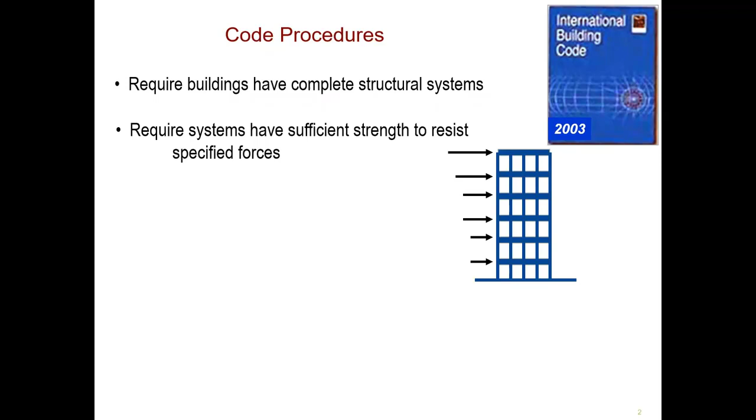So today's topic is the next generation performance-based seismic assessment. And I would like to start with some background. The code procedure, what is a code, a building code? Building codes require buildings have complete structural systems, right? It requires systems have sufficient strength to resist the specified forces, and it limits the permissible drifts under specified forces.

And lastly, it requires members and connections be detailed prescriptively, right? So the purpose of building codes is the ability to resist frequent minor earthquakes without damage. And by frequent and minor earthquakes, their probability of occurrence is 100 years. Okay, the ability to resist infrequent moderate earthquakes with limited structural and non-structural damage, and the return period of that earthquake is 500 years, which is sometimes called the design earthquake.

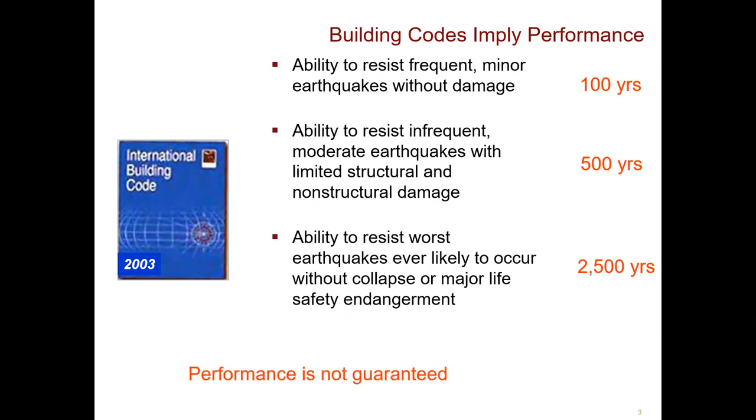And the ability to resist the worst earthquakes ever likely to occur without collapse or major life safety endangerment, and its return period is 2500 years. So the building codes give you the safety, but the performance is not guaranteed, right? And if a building is affected by an extreme event and performs poorly, there is an expectation of how the building should have performed, but no implied warranty.

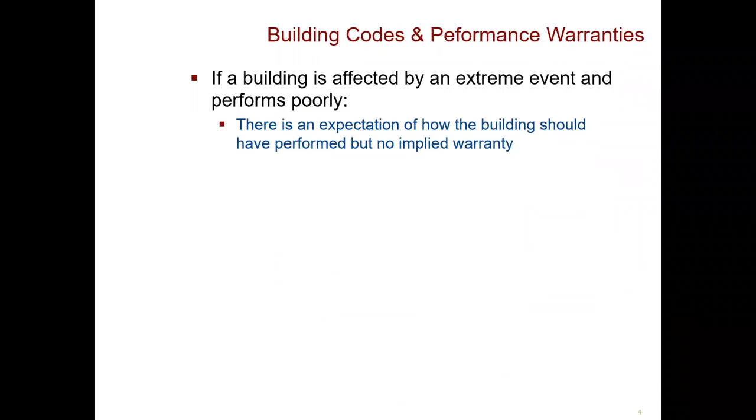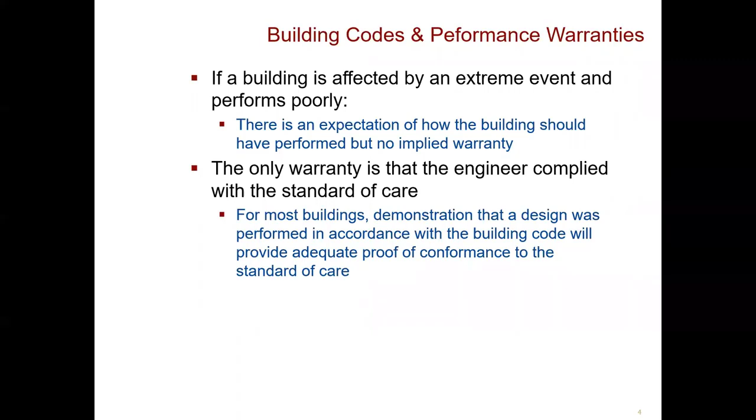Secondly, the only warranty is that the engineer complied with the standard of care. For example, if he has followed the building codes, the design codes, then this is the only warranty that the structure will not fail during a certain earthquake of a specific return period. For most buildings, the demonstration that a design was performed in accordance with the building code will provide adequate proof of conformance to the standard of care.

FEMA document 178 is the seismic evaluation of structures, specifically buildings, and FEMA 356 is related to the rehabilitation process. So though not directly recognized by the building codes, these standards are being used as the basis for performance-based design of new buildings and seismic retrofit.

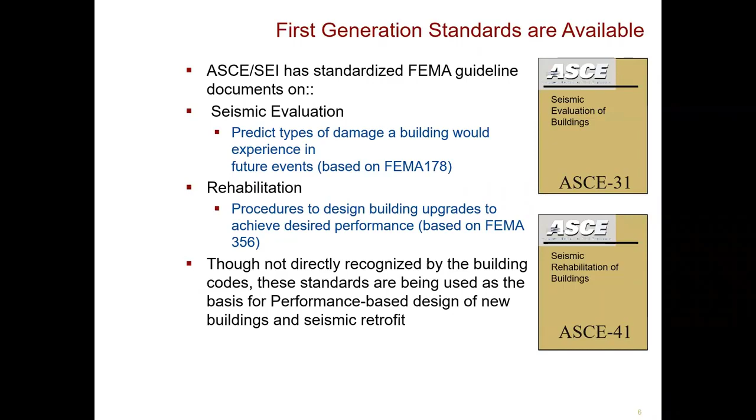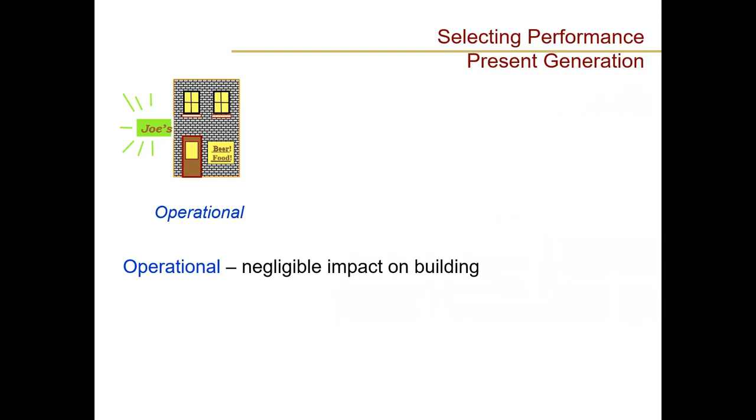So now we are moving towards performance-based design or assessment. What is performance-based design? What does performance mean, right? So before going into detail, we need to understand what was the performance criteria in the first generation of performance-based earthquake engineering. For example, it is a house. The nameplate says it is Joe's house, right? And there is beer and there is food in this house, and it is fully operational.

Now, what does immediate occupancy mean? That it has been affected during the earthquake, but you can occupy it immediately after the earthquake, right? So operational is negligible impact on the building, right? And immediate occupancy is the building is safe to occupy, but possibly not useful until cleanup and repair has occurred.

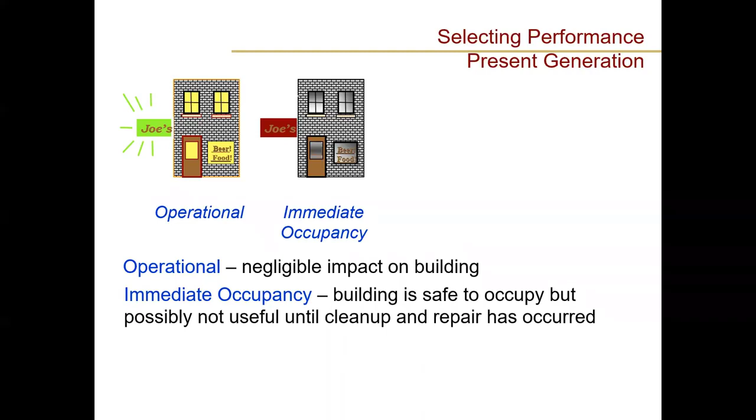So there is a chance that some non-structural components have been cracked or damaged, and you need to clean those plasters and the distempers and some of the items from your cupboard or your kitchen utensils that might fall. So you need to clean up all those things, right?

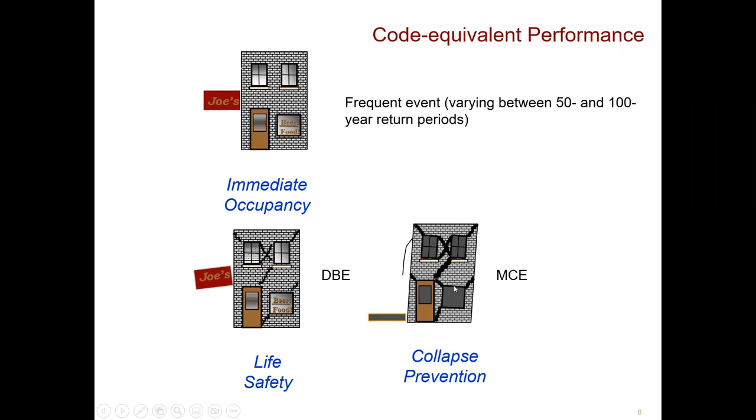So after that, the ATC 58 project started. And what is ATC? It is the Applied Technology Council. We will discuss it in detail. And it started a 10-year program which was funded by FEMA, and its objective was to develop the next generation criteria applicable to design of new buildings and upgrade of existing buildings, right?

So the new performance definition required at that time, at the beginning of a new century or the new millennium, was performance expressed in terms of the probability of incurring the direct economic loss, which is in terms of repair or replacement cost, the casualties, which includes the deaths and the serious injuries, and the downtime, which is loss of use.

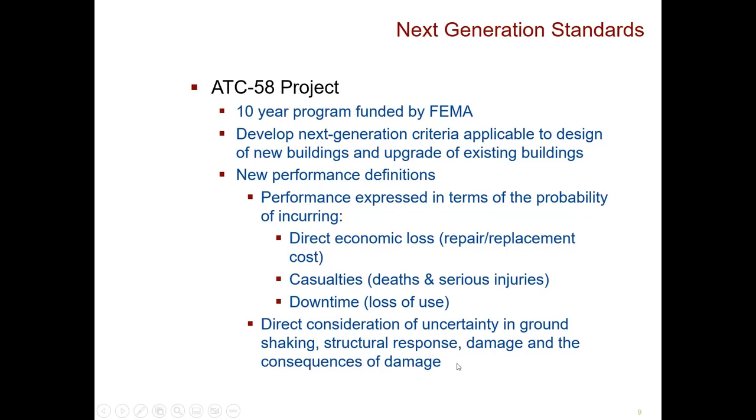So in the recent earthquake of Turkey and Syria, you might have noticed the economic losses and the casualties and the downtime of the structure, right? So it is all based on the next generation performance criteria. So the direct consideration of uncertainty in ground shaking, structural response, damage, and the consequences of damage. So you have to consider all these in your performance objectives, right?

So the first step is to select the performance objectives, which is to be selected by the owner, the designer, and the building officials. For instance, in Peshawar, the PDA is the building official, right? The second step is to develop the preliminary design and to check or assess the performance capability.

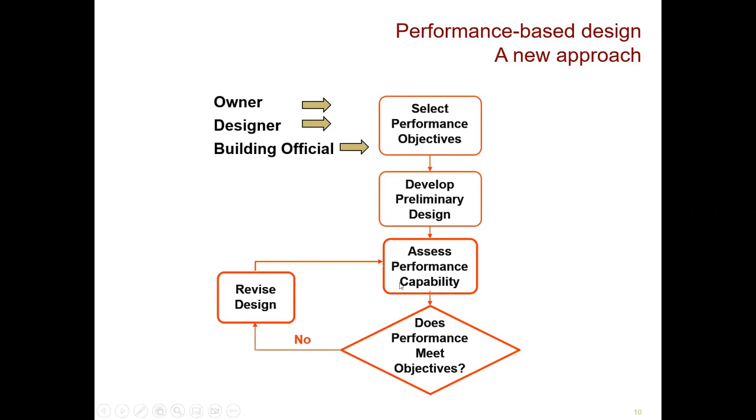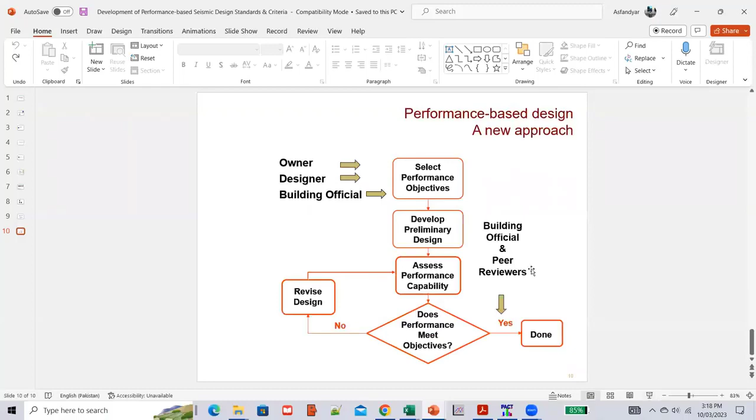And then, does performance meet the objectives? If yes, then you are okay. If no, then revise the design and continue this cycle until you get this yes, and then it is done. Okay, and it is done by the building official and the peer reviewers. So it was a very small introduction about today's topic.

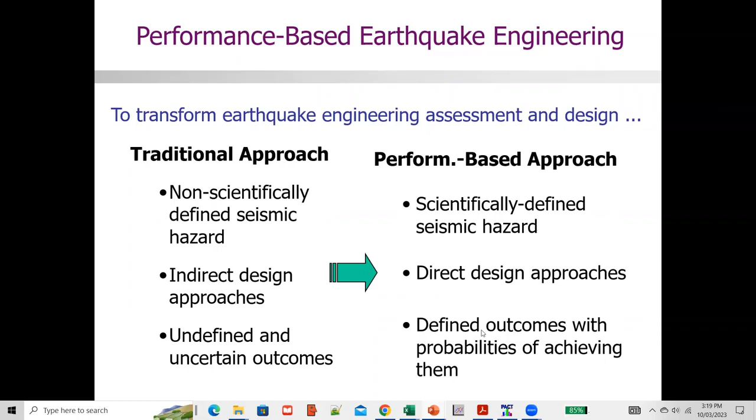Now I would like to give you some insight about performance-based earthquake engineering. To transform earthquake engineering assessment and design: the traditional approach was a non-scientifically defined seismic hazard. Instead of indirect design approaches, you define outcomes with probabilities of achieving them, right? So there are some well-defined outcomes and you have to achieve those outcomes.

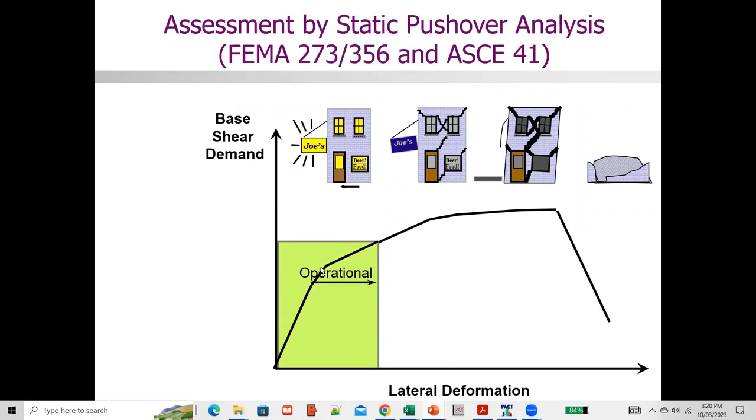FEMA 273 or 356 and ASCE 41 give this assessment criteria where you can see that the base shear demand and the lateral deformation are plotted, and the lateral deformation increases, causing the base shear to increase up till this peak or the ultimate strength value, right? So till this point your structure initially acted within its elastic range, right? So up till this point it is called operational.

After the operational, it is in the range of life safety, and till this peak point, the maximum or the ultimate point, it is structurally stable and it will not collapse. But after this point, the structure will collapse. So you need to be careful about this peak point or the maximum resistance of the structure.

The frequent earthquakes, which have a 50% probability in 50 years, it will resist those earthquakes in this elastic range. The occasional events, which have a 20% probability in 50 years, will occur within the operational range, but in the inelastic range, right? The rare events, which have a probability of 10% in 50 years, will lie in this range. It means that the structure will resist those earthquakes in this range.

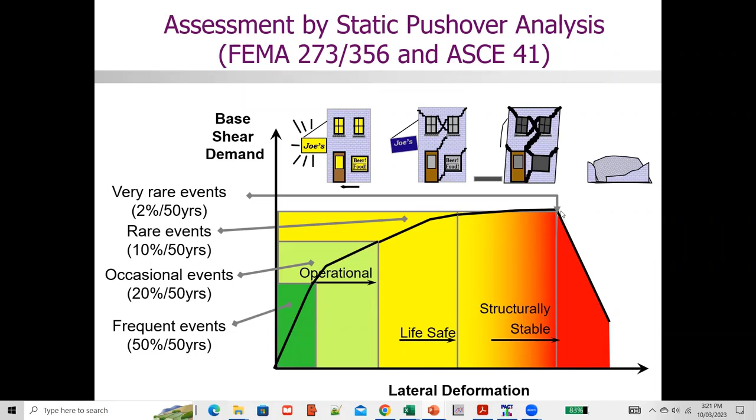And very rare events, which are also called the maximum considered earthquakes, the structure will resist them at the ultimate load, but eventually it will not collapse and it will be at the verge of collapse. So the inhabitants will be safe during the earthquake.

Now, yesterday's, meaning the previous, performance-based earthquake engineering was what we just discussed in this slide, right? But it is not today's performance-based earthquake engineering. What is today's performance-based earthquake engineering? As we discussed in the previous presentation, it is more about some well-defined objectives: what will be the replacement cost, what will be the casualty rate, and what will be the downtime in days, for example.

So if you are talking about life safety, right? At the life safety level, the replacement cost of the structure will be about 75% of its total cost, the casualty rate will be 0.01%, and the downtime will be about 50 or 60 days. It means that you cannot use the structure for about 2 months. So this is more realistic, and this is what you can tell your client, because it is more understandable language.

So performance based earthquake engineering has changed today, right? The damage assessment of the non-structural fragilities is as important as the damage assessment of the structural fragilities. Because in the previous approach we just needed to consider the structural elements, draw their fragilities, and analyze the structure. But in the next generation performance based assessment, we need to consider those non-structural elements and their failure pattern as well.

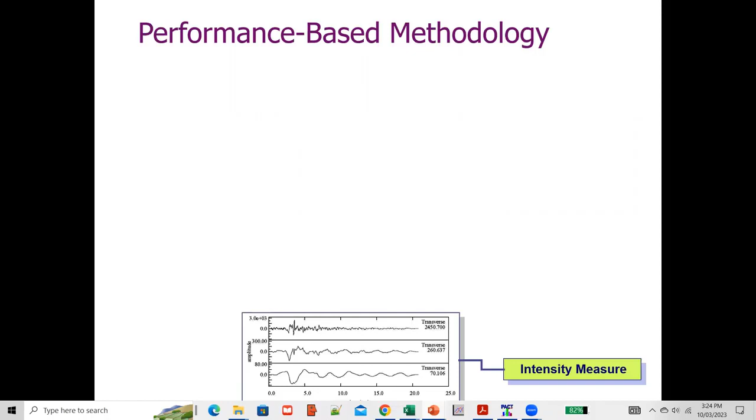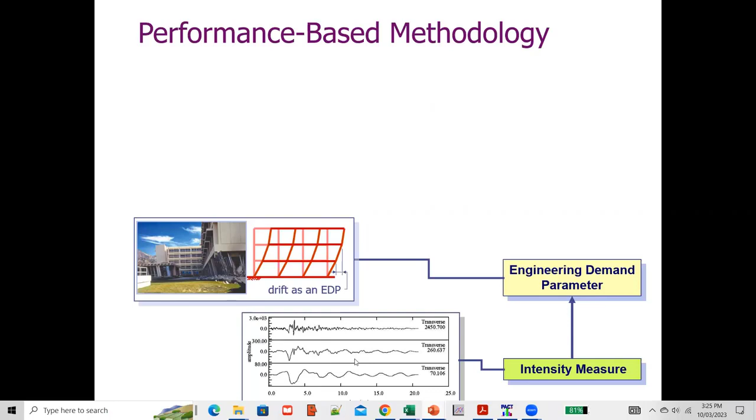Now moving to the performance based methodology. You have to define the intensity measure. The intensity measure is your time history. For example, you take the time history of some earthquake, model your structure, and run the time history analysis. I'm just using time history analysis for instance; you can use different methods. From that you measure the damage that occurs in the structure, and on the basis of all these parameters you decide your variables.

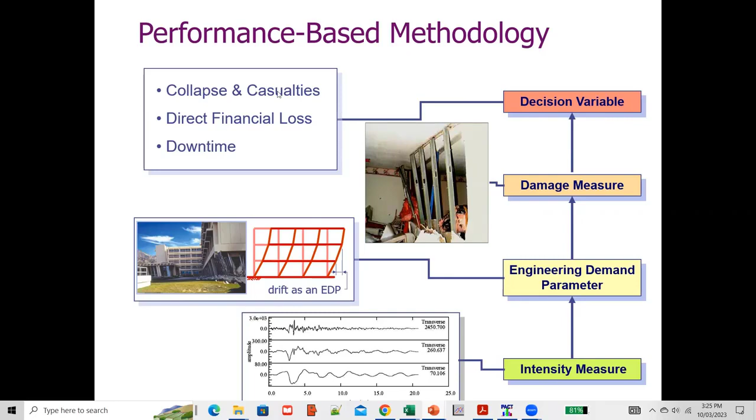For example, how much was the collapse and the casualties, how much was the direct financial loss, and how much was the downtime. In performance based assessment you need the incremental dynamic analysis as well, and later we will discuss an alternative, because it is a complicated thing and not everyone can perform it. You can do it with the standard pushover curve, and I will show you how to perform the incremental dynamic analysis with the static pushover analysis.

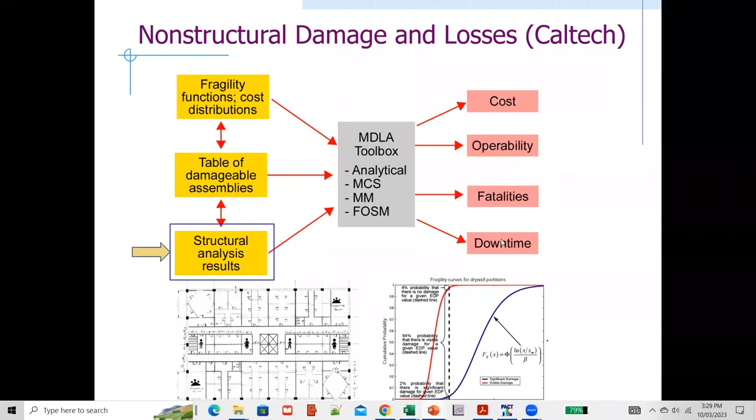The non-structural damage and losses, you can compute it by different toolbox and different methods. What are the input required? The fragility functions, the cost distribution of the non-structural elements, the table of damageable assemblies, and the structural analysis results. So all these three goes into this toolbox, and they give you the cost, the operability, the fatalities, and the downtime, right? Which we are keep on talking again and again.

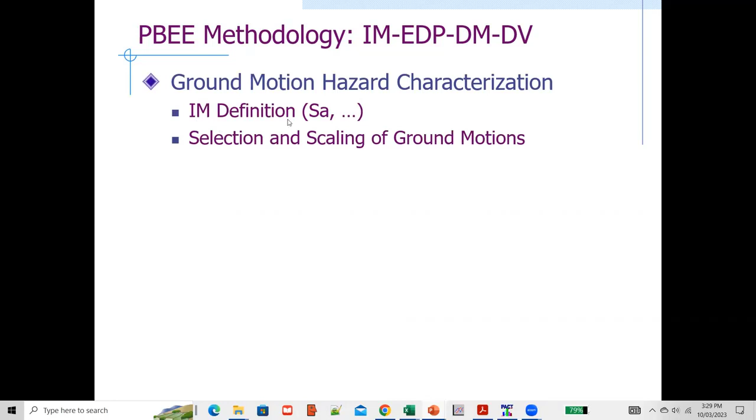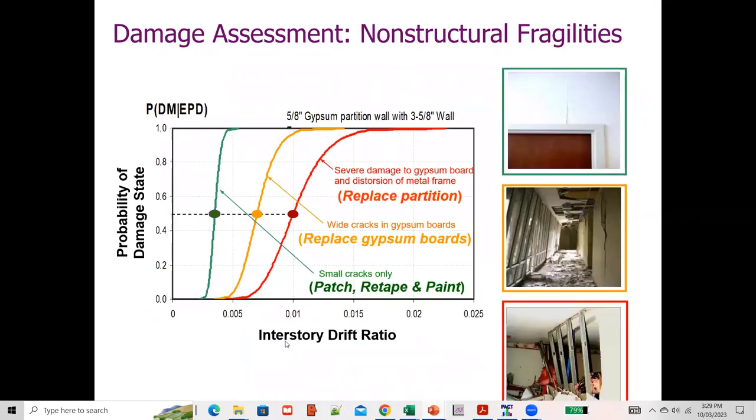So the performance-based earthquake engineering methodology, the ground motion hazard characterization, where you have to define this intensity measure, for example, the spectral acceleration, the selection and scaling of the ground motions. The second step is the simulation, right? Engineering demand parameter. The choice of engineering demand parameter is, for example, we talked about the drift, right? Let me take you to the graph. See, here the demand is structural response in terms of drift. Also, if we go back to here, also the demand parameter is inter-story drift ratio, right?

So it depends on you what you are gonna take as the engineering demand parameter. You can take it as a drift, or you can take it as a floor acceleration, or any other. For example, the velocity, the fidelity of simulations to model the collapse, right? The third step is the damage modeling. So first you have to define intensity measure, then from intensity measure you have to define the engineering demand parameter, then from the engineering demand parameter you have to go for the damage modeling. For example, the taxonomy of the components, the definition of conditional EDP to DM, that is damage function.

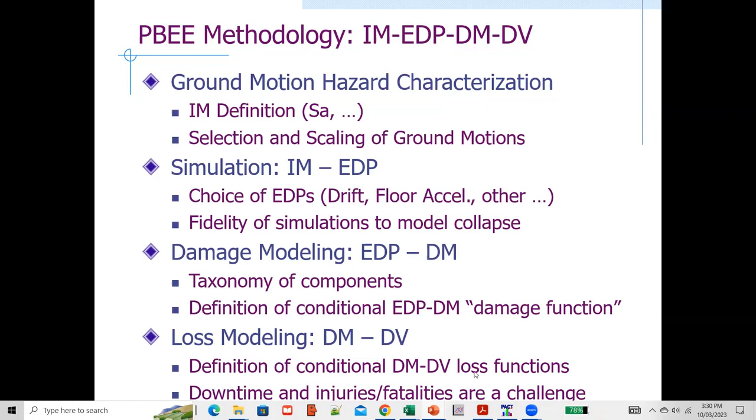And the fourth one and the final one is the loss modeling, right, which is called the decision variable, DV. So definition of conditional DM, DV loss functions and the downtime and injuries fatalities are a challenge to compute exactly and accurately. So this is basically the flow chart. It goes upward. You have to define the intensity measure, which is the earthquake hazard characterization, right? You select some certain earthquake and you take it as your intensity measure. Then you find the engineering demand parameter.

For example, you subject your structure to that earthquake and you simulate the system response. And due to that system response, you quantify the damage measures, which is called the damage measure, the third step. And the final step is on the basis of these damage measure, you define your decision variable, which is relating performance to risk decision making. And these are in terms of the things that we just discussed.

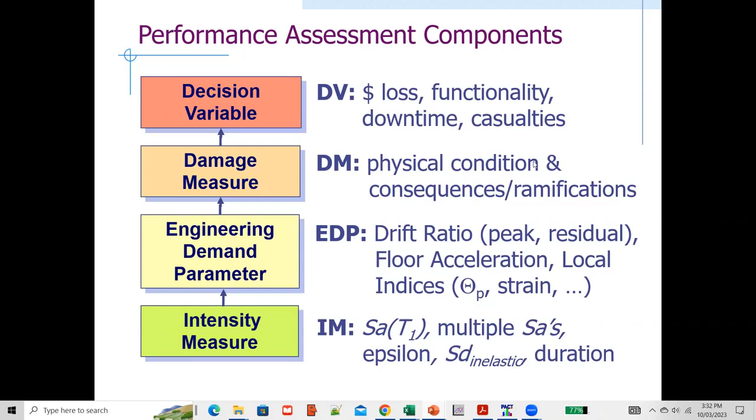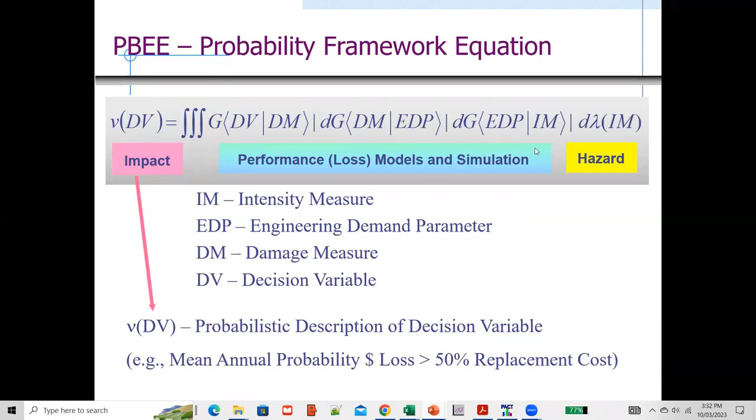For example, the spectral acceleration can be your intensity measure, and you can use multiple SAs, epsilon, which is the strains, right? The SD, inelastic duration. The EDP, as I already discussed, can be drift ratio, floor acceleration, local indices, etc. The damage measure can be physical condition and consequences or ramifications, and the decision variable can be loss, functionality, downtime, casualties, etc. This is the equation that has been used to compute this decision variable, and it depends upon DV, DM, EDP, and IM. All of them we have just discussed in detail, right?

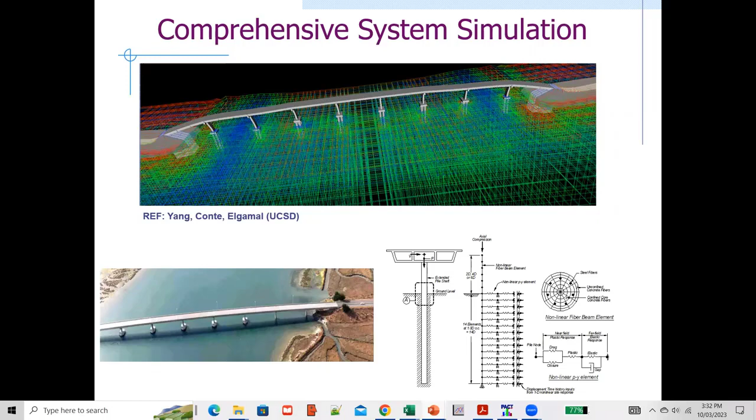This is an example of the simulation model that you run the simulation, you get the structural analysis result, and you get the structural response, and on the basis of that you measure the damage variables. And after that I would like to take you to what is the FEMA P58. So FEMA P58, you can just simply Google it, and you can see that the history of FEMA P58, what it says that it started in 2001.

You can get all the details of ATC 58, the Applied Technology Council, and they performed the research for more than 10 years. And then they have given you a complete package, right? And that complete package is about the next generation performance based seismic design guidelines, and you can follow these guidelines and you can just perform the next generation performance based seismic analysis of your structure. But you need to understand what are the requirements of this system. For example, you can go to different, you know, the volumes.

There are different volumes, volume 1 to volume 7, and you can download them, you can read them, and it will give you a very detailed description and the requirements that you need to follow in order to perform this performance based assessment, which is the state of the art method.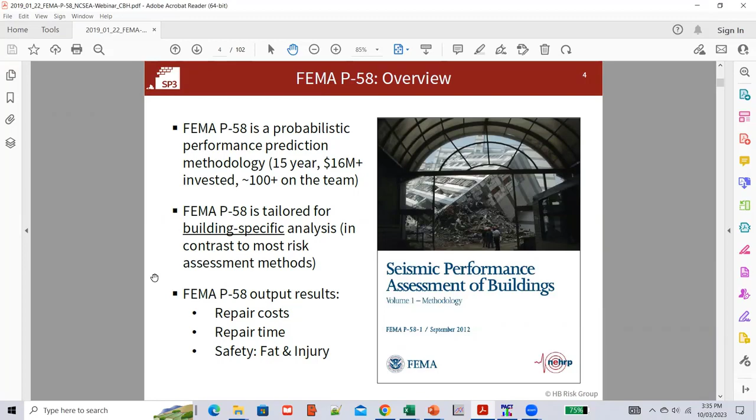So FEMA P58 is a probabilistic performance prediction methodology, and it took 15 years and 16 million plus dollars invested, right, with 100 plus members on the team. So FEMA P58 is tailored for building specific analysis in contrast to most risk assessment methods, right? FEMA P58 output results are the repair cost, repair time, safety, injuries, fatalities, and casualties.

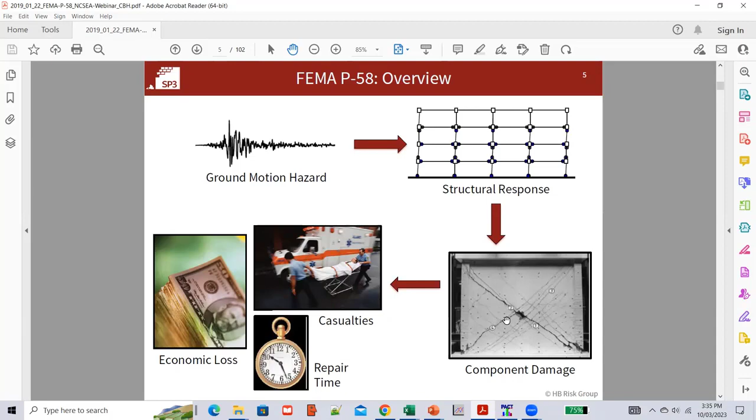The overview is that you need to define a ground motion hazard, and you run your structure, and the structural analysis will give you the structural response. Then you need the fragilities of your structural elements and the non-structural elements. So you need to put the component damage, and on the basis of that component damage, it will give you the casualties, repair time, and economic loss.

The comprehensive and credible benefits are that it took a lot of resources. Just like we discussed, the standardized and repeatable consistent FEMA P58 damage and repair cost databases are used consistently for all analysis, right? Because it is created based on 20 plus years of research, and the analysis incorporates the specific nuances of the building rather than being based on a building class. So you can use it for a variety of buildings.

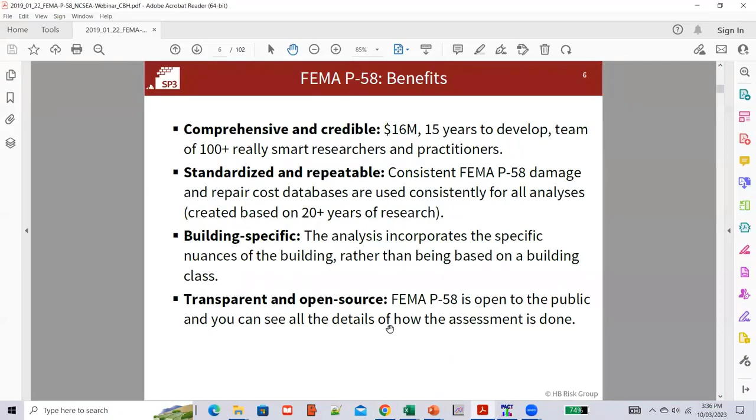The transparent and open source FEMA P58 is open to the public, just like I showed you. You can go and download it for yourself. It is open to the public, and you can see all the details of how the assessment is done, right? And these are the detailed steps of the method, and I will show you the method by following these steps.

The site hazard, the structural response. I think this is the fifth or sixth time that we keep on repeating these things, because these are the fundamental steps that we need to follow. The structural component fragilities, the non-structural component fragilities. This is the new thing that you will understand in this exercise. And then FEMA P58, which is using a Monte Carlo analysis engine, runs and gives you the results, right?

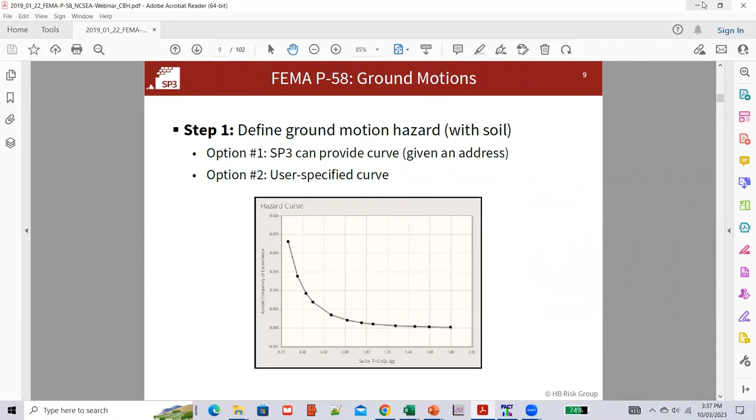So instead of performing the things here, let me take you to that software which is called PACT. You can just download it. It is here. The first one, you can see performance assessment calculation tool, which is executable software for PACT, and this is the latest version 3.1.2, and you can download it. It will get downloaded very easily, and just run it, and you will see an interface like that, right?

So here are different buttons. These are related to your PACT operation, and these are related to your PACT utilities. Before going to the PACT utilities, I will take you to how it works. For example, go to model the building and import analysis results. So just click it, and an interface like this will open.

Okay, so here the first tab is about the project information. You need to enter the information of the project. For example, the project ID, the building description, the client description, the engineer description, and the cost multipliers, right? The date cost multiplier and the region cost multiplier.

For example, if it is going to happen in 2024, then the cost multiplier will be, let's suppose, 1.25 to the original one. And it also depends upon the region. You can also do it. For example, there will be a cost difference in Karachi and in Quetta, right? Or a remote area, for example, in Gilgit, the cost will be much more than in the main hub, right? So you can define this basic project information.

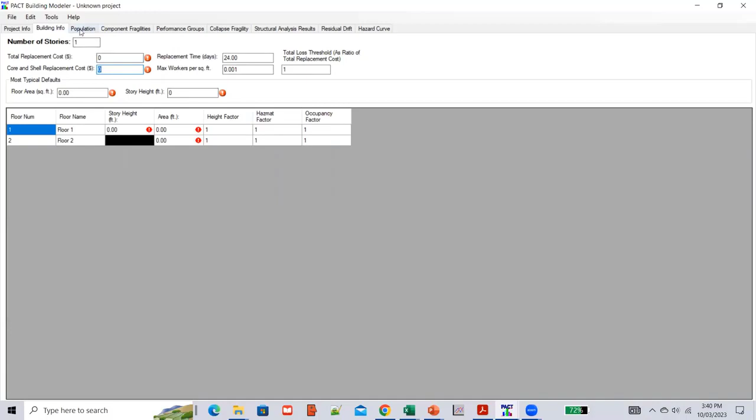And the third tab is about the population, because it is very important to know whether it is a commercial building or a residential building. And what's the difference, let me show you. If you are designing or assessing a commercial building, you can see the population model for that is, let me select, right. So here you can see that at 12 in the night, there is a 0% probability that someone will be in the building, right? But at 10 a.m. in the morning, 10 to 11, there is a 100% probability on the weekdays that it will be fully occupied, for which it was designed originally, right?

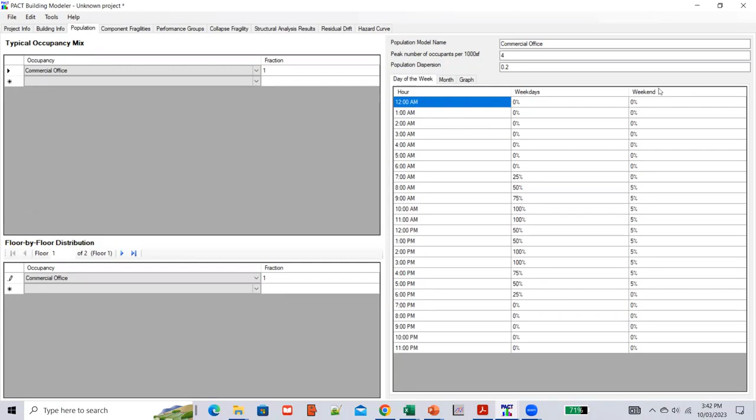So it gives you the probability of that earthquake happening, for example, at what time of the day and what day of the week. So what will be the population model? And it is very important. If you check the graph for this commercial office, you can see it is like this, right? This is for the weekdays and for the weekend. For the weekdays, it is going from 0 to 4, because the peak number of occupants per 1000 square feet is 4. You can increase it, you can make it, for example, 50, right? So it is up to you.

And if you go to, for example, the weekdays, it is going from 0 at 6 a.m. to 50 at 10 a.m., right? And then the break, and then again coming back from the break, and at 7 p.m. in the evening, it is again going to 0 for the weekdays. And for the weekends, it is 0 up to 7 a.m. And there is a 5% probability, so most probably 2.5 persons are in the building till 6 p.m., and then it is going to 0.

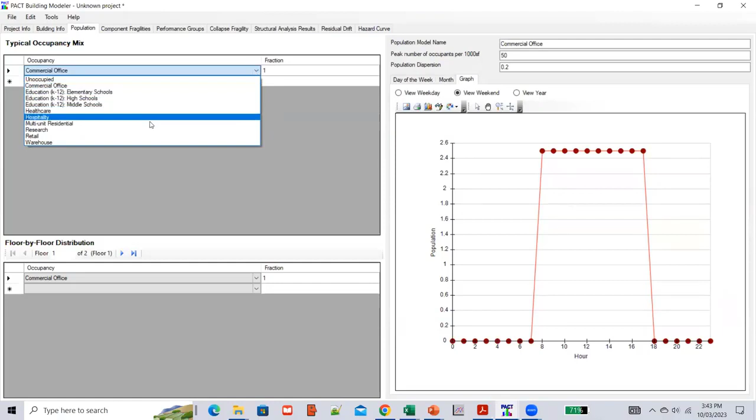Now if you select residential building instead of commercial, what will happen? For example, it is a multi-unit residential here and here as well. So you can see that the weekend is just opposite to that of the commercial one, right? Because everyone will be at home in the night, and they most probably go out in the morning, spend the day outside, and then come back in the evening, right? So this is for the weekend. And for the weekdays, there is a probability that the residential units will not be occupied. For example, in the night, it will be completely occupied, because here the peak number of occupants is 3.1, so it is occupied 100%.

And let me take you here, you may easily understand. So on the weekdays, it will be occupied 100% in the night, and 20% because some inhabitants might stay at home, and they do not need to go for jobs or business or some sort of activities outside the home. And in the weekend, the probability is that it will be at least 50% populated. So this tab will give you the population density during the week and during the day of a week.

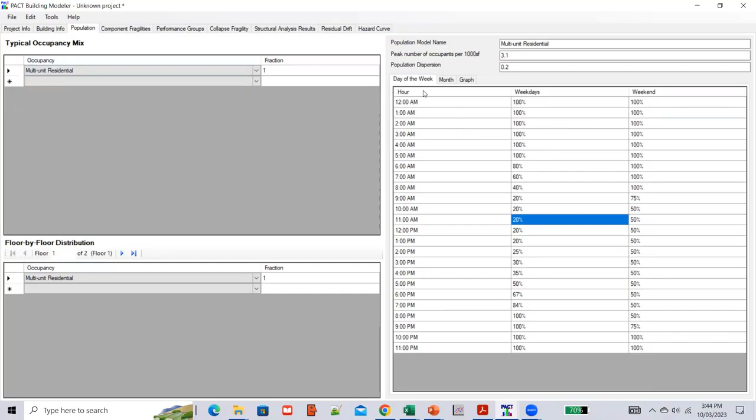So it is very important to define it correctly. Then a very important tab called the component fragilities comes, and for that you need a tool which comes here, the provided fragility data. You have to download it, and it will give you this Excel sheet, which is this normative quantity, right?

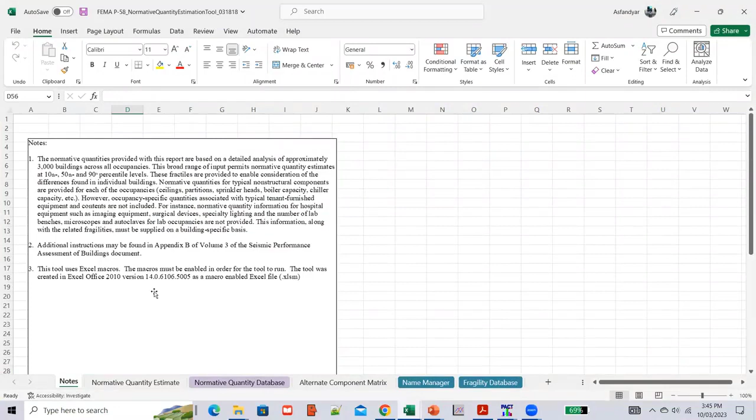After defining this, you just click compile, and it will tell you how many groups should be in your structure, how many structural components and how many non-structural components should be in your structure, given the details you have provided. So this tool will tell you, for example, how many wall partitions of gypsum with metal stud have to be used in the interiors, right? Similarly for floor finishes, wall finishes, the ceilings, etc.

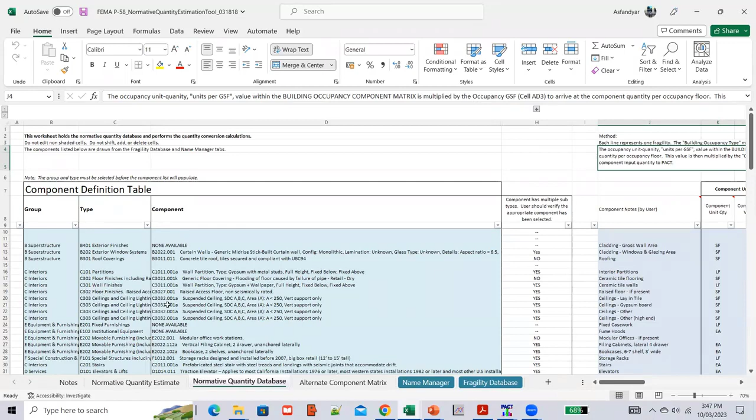It has calculated all these things based on the details you provided in this highlighted area, and you can calculate here what the claddings are for the glass wall area, and what the 10th percentile quantities are, and you can name it. You can specify it for your structure, and after doing this you can go to PACT and easily specify, for example, I am working on floor 1, and what will be required in the foundation. So you can select in your foundation any type of fragility that has been given to you by that software.

If you select it, it will give you the detail. Okay, I am not going to show it here. I will open an example, and then I will show you these things. Okay, so just now we are going through it.

The next step will be the performance groups, and it is linked to these component fragilities. Once you define it, you can export it here. You can click update table in direction 1, direction 2, and non-directional. So you can import the data over here, and go to the next step, which is the collapse fragility. You can define the collapse fragility for your different structures, for example, the median and the dispersion, and you can define your collapse fragility for different floors as well.

The next step is structural analysis, and as we discussed in the presentation, the structural analysis basically requires incremental dynamic analysis, right? But not everyone can perform incremental dynamic analysis. So PACT, or FEMA P58, has provided a tool called static pushover to incremental dynamic analysis, and when you download it, it will be in the form of this Excel worksheet, and it gives you the instructions you need to follow. See, it says that it was last updated on January 9, 2012, and has been used successfully since then.

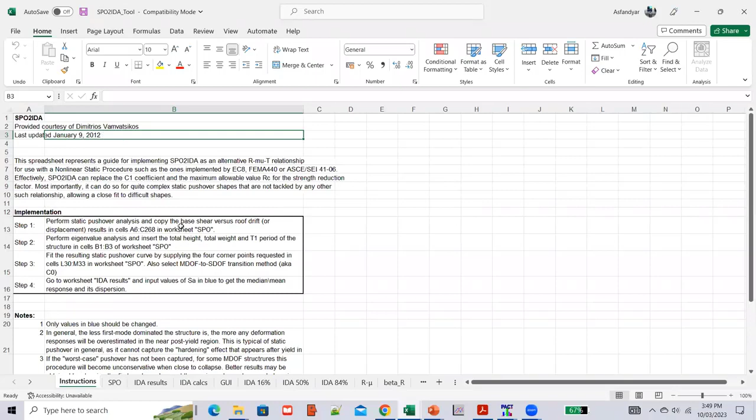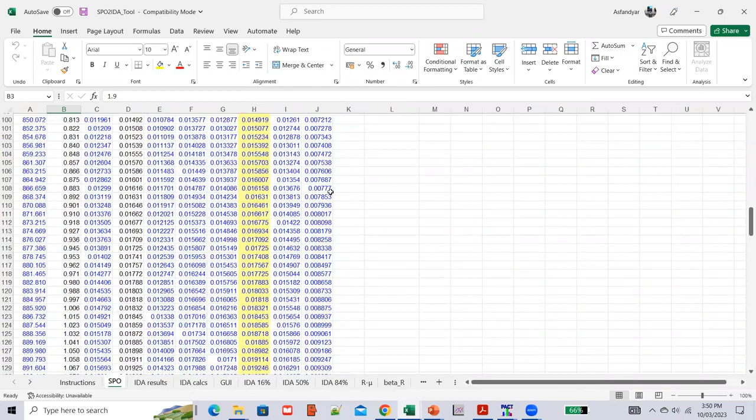So after reading these instructions, you go to this first sheet, which is about SPO. This is where you put the details of your structure. For example, you have to define the weight of your structure, the height of the structure, and its time period, right? In this region you have to provide the pushover curve for your structure. So you just need to perform the pushover analysis and put the values in this table, and it will be like this. For example, this blue line is the pushover line, right?

See, it is highlighted here. So when you copy and paste your data in these cells, your pushover curve will be different than this one, right? Of course. And then you need to fit this curve with your static pushover curve. So these are the inputs that you need to adjust in order to fit this dotted curve with your pushover curve, right?

So you have to define the elastic point and its drift, for example the roof displacement and the base shear. So you have to define your first point, which is for example this one, 840 and 0.7. So you can see that 840 and 0.7 is your first point. The second point is 912 and 1.3. Since they are overlapping, it is showing you the detail for this one, 911 and 1.31, and then it is coming to 0 at 1.31.

See, this dotted curve is fitting your static pushover curve, and once it fits, then it is very simple to calculate the spectral acceleration, which is required to put in your PACT software. For example, here you need to define the SA, which is the spectral acceleration, right?

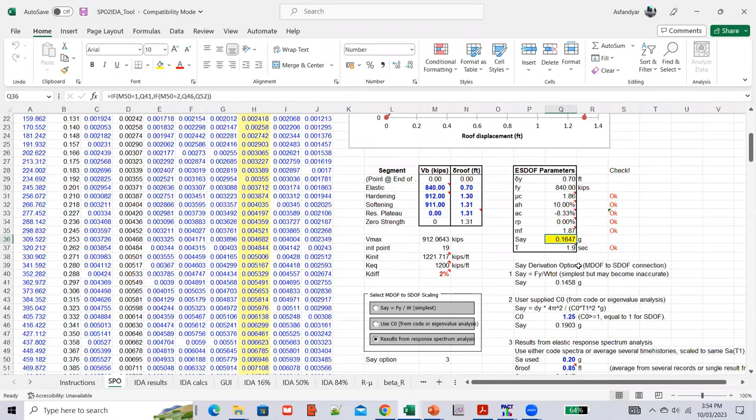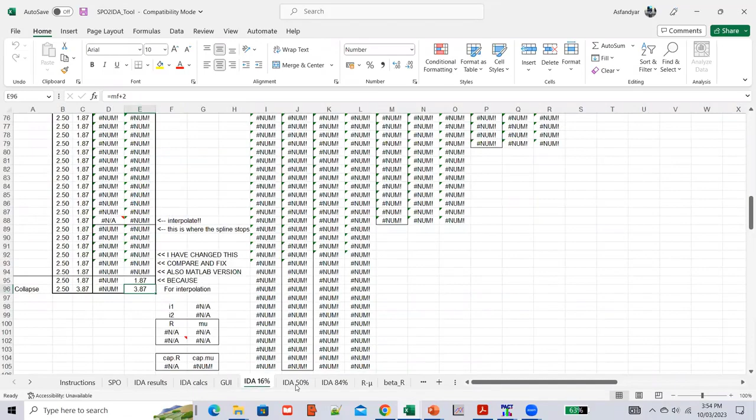And after that you can check different details, for example the incremental dynamic analysis results, the calculations, the GUI, the 16 percentile, 50 percentile, and 84 percentile results, and much more. So whatever you want to know about how it converts your static pushover to incremental dynamic analysis, and how your multi-degree of freedom system has been converted to single degree of freedom, you can check this file in detail. Once you get the things from that, you can just put it here.

Okay, after structural analysis, you have to define the residual drift, and then you have to define the hazard curve. So without wasting time, let's open a solved example. For example, I have done a 3-story confined masonry back in 2018, and let me open it for you.

I think we are also running out of time because it was supposed to be 1 hour.

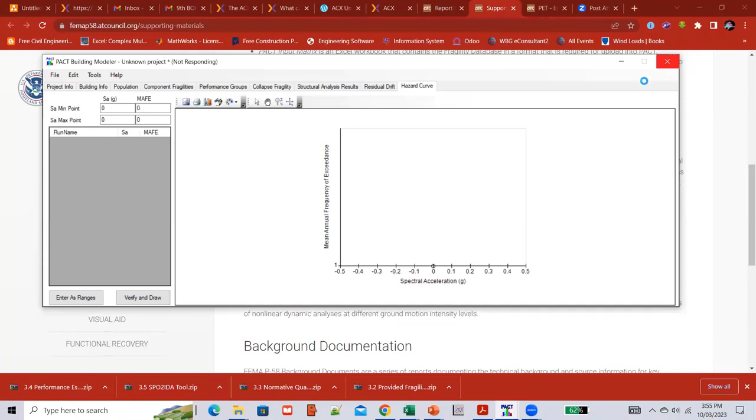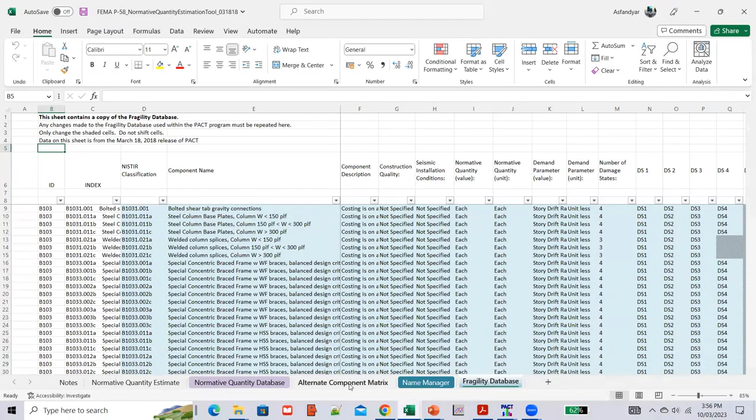The component fragilities, just like I showed you this tool, I use this tool to get the component fragilities, which components will suit my structure, and then I selected them. You can see here that it is for floor 1, then you can move it to floor 2, floor 3, and then floor 4, right? So all the floors will have different requirements depending upon what you have defined.

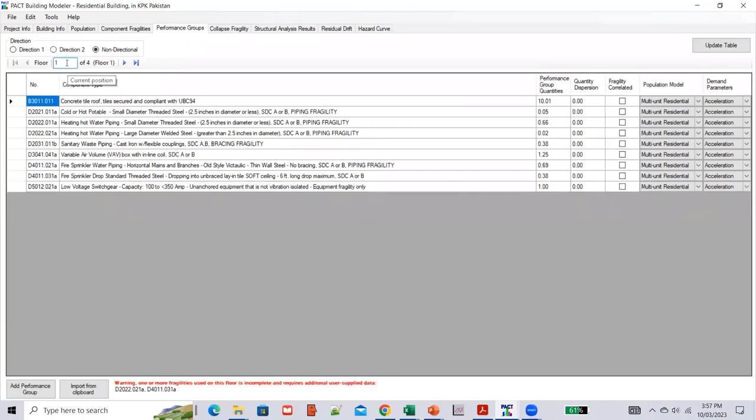Then going to the performance groups, see, these are the performance groups in direction 1. Then when I select direction 2, these are the performance groups in direction 2, and when I select non-directional, it changes, right? And it was for floor 1. Now go to floor 2, floor 3, and floor 4. So at the 4th floor, there are no directional components, no direction 1, no direction 2, right? On floor 3, it is, I think, more or less like the previous floors.

After that, you have to define the collapse fragility. For example, for floor 1, floor 2, floor 3, the mode 1 comes from my non-linear time history analysis and the mode shapes that I got from there. And these are the collapse consequences: the mean value of fatality rate, the fatality rate coefficient of variation, the injury rate mean, and the injury rate coefficient of variation, right? So you need to define these things. So here the median is 3.35 and dispersion is 0.63.

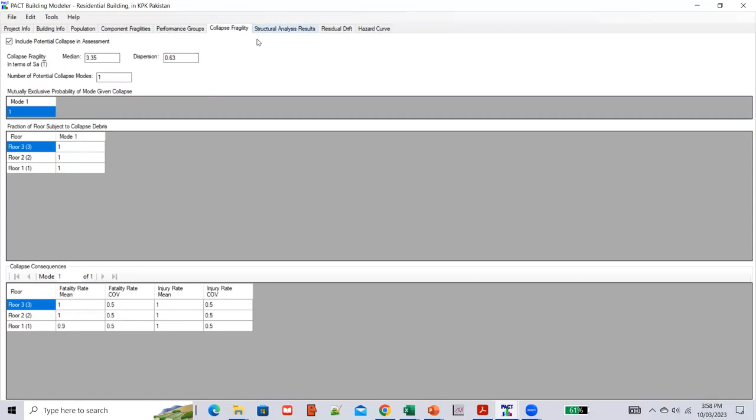And then the structural analysis, which I got from the tool that I just showed to you, which is SPO to IDA, and the results from this point are used here. For example, the spectral acceleration provided by that tool I have used over here, and I have used 8 intensity parameters. Intensity 1, intensity 2 gives me a different value. Intensity 3, so you can see the acceleration value has been changing, right? Intensity 4, 5, 6, 7, and 8. So all 8 different intensity levels are giving me different values of spectral acceleration.

And also please keep in mind that here the direction has been selected as direction 1, and the demand type is selected as story drift ratio. You can change it to acceleration as well. You can add intensity, you can delete intensity, it is up to you. After this structural analysis, I will show you this residual drift, right? The residual drift is median with 0 and dispersion with 0.

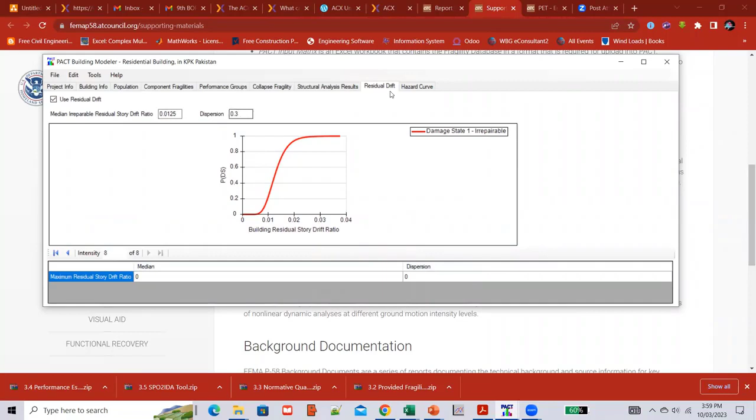The median irreparable residual story drift ratio, and the dispersion, and the hazard curve that I told you previously is drawn specifically for some region, for example, for Peshawar, Abbottabad or Muzaffarabad region, the hazard curve will be a unique curve, right? And after putting all these details, what will be the next step?

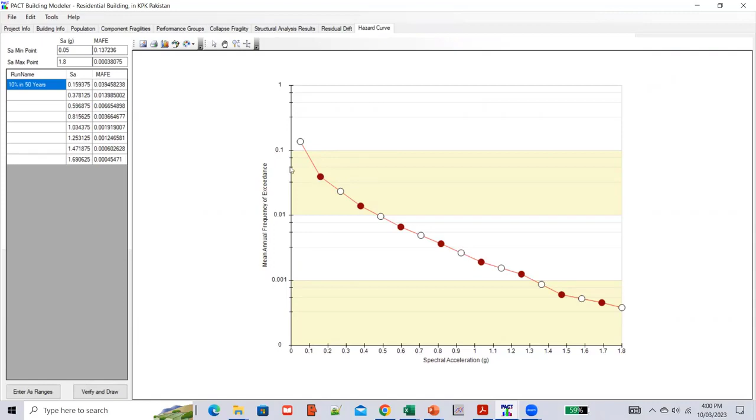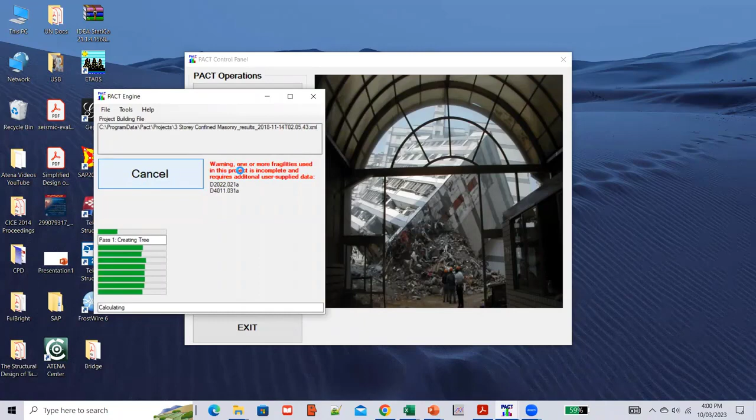The next step will be to go to the tool's main interface and click this evaluate performance button. When you click it, it will ask you which one you want to run, right? So open the building project, the one we just saw. Just click run evaluation, and it will evaluate your model and all the details that you have provided. The warnings are common unless you have done a blunder. See, it tells you that the analysis has been done. So just click examine results.

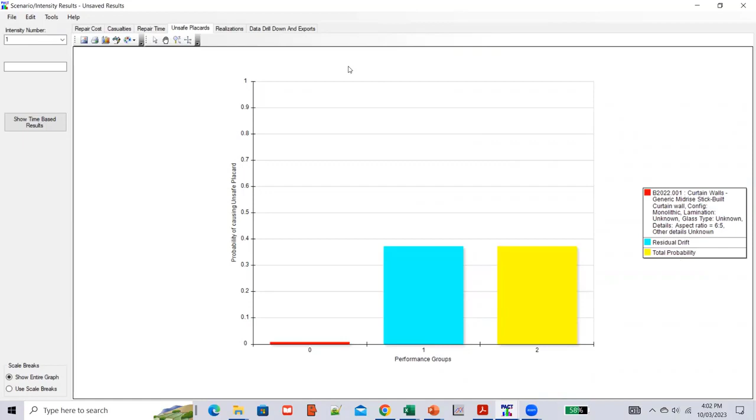The unsafe placards, that the curtain walls that will damage, its probability is very less as compared to the residual drift and total probability. Also the realizations, the data drill down, and other details. There is another way you can check these results. For example, show time based results.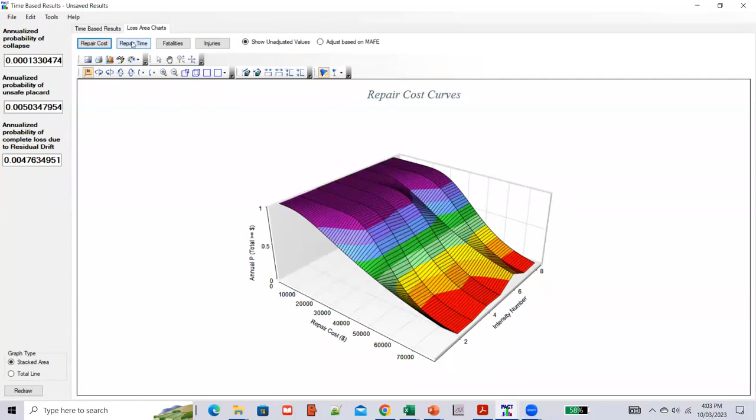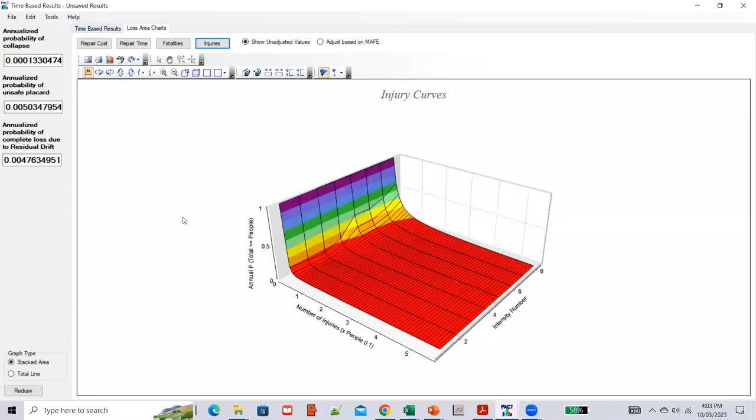Similarly, this is for the repair time. This is for the fatalities. From fatalities, they mean the deaths, right? And these are the injuries. So you can check the results in this interface as well, and you can check the result in this interface as well.

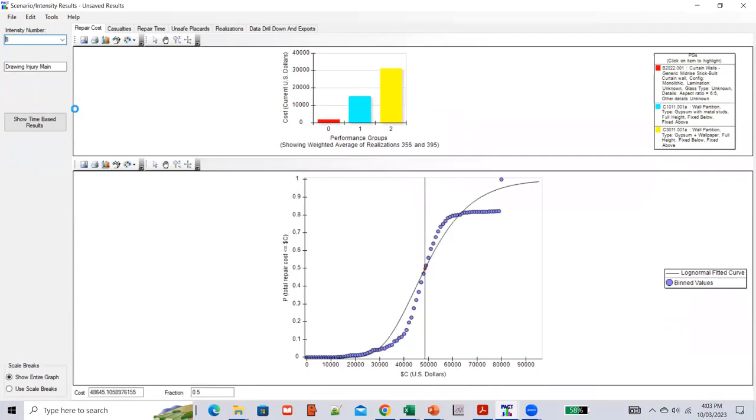And you can also go for different intensity numbers. For example, for intensity number 8, the results will be totally different, right? For example, the repair cost, the casualties, see, the casualties have been changed as compared to the first one.

The repair time, now the red has been removed or minimized for the floor 1, and there is a yellow one which is about wallpaper full height fixed below and fixed above, right? And there are other parameters that you can check for your intensity numbers. And there are some other things.

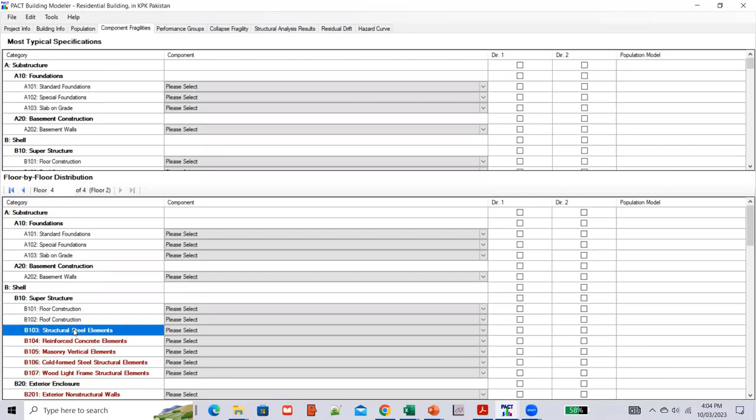For example, let me take you to this fragility specification manager, but before that, let me take you to this point where you have to define the component fragilities, and I have selected, for example, structural steel elements, right? So what does this mean? What will happen if I select in the roof construction the structural steel elements, okay, B103. So let me show you what it actually means.

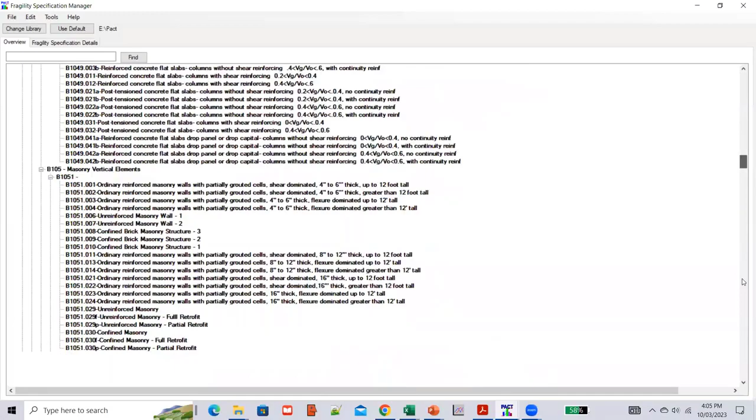So the fragility specification manager, it will take you to all those fragilities, to all the library, and you can see how many fragilities they have defined. So there are thousands of fragilities for the structural and non-structural components that they have defined, and that's why they were saying that it took 20 years for them to compile this data.

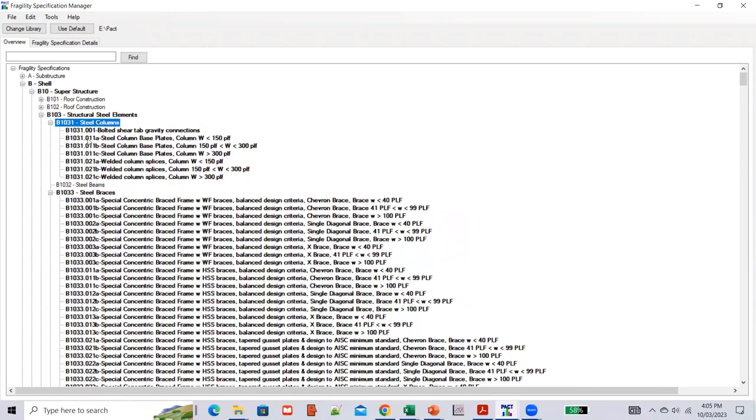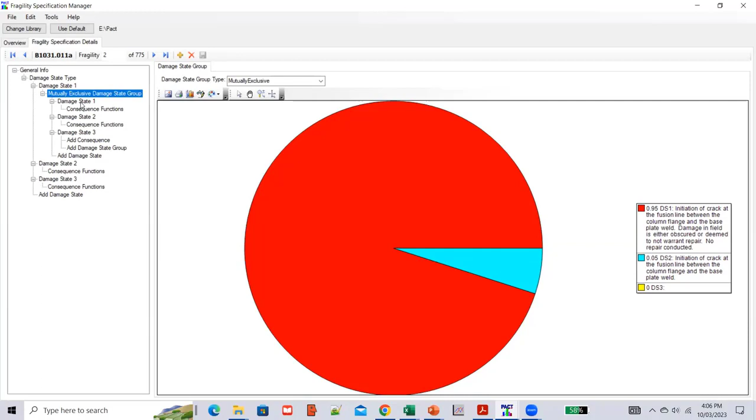For example, you can change the median and the dispersion, and you can see the initiation of crack at the fusion. So this is your damage state 1. This is the description. This is a fraction, and this is the consequence function.

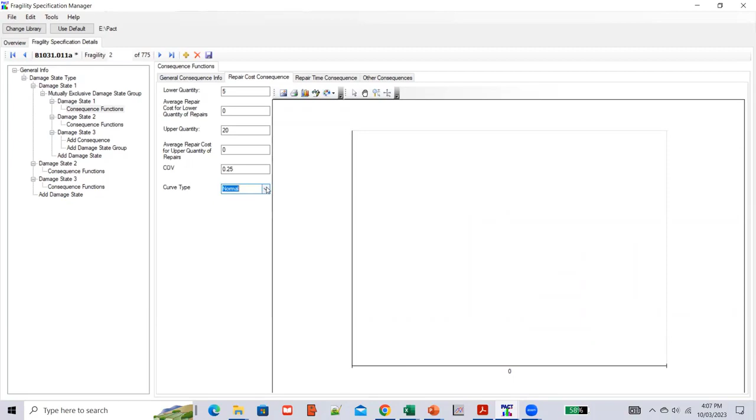For example, what will happen at the damage state 1? So the repair cost consequences, right? These are the repair cost consequences. These are the repair time consequences, and these are the other consequences. So everything for the damage state 1.

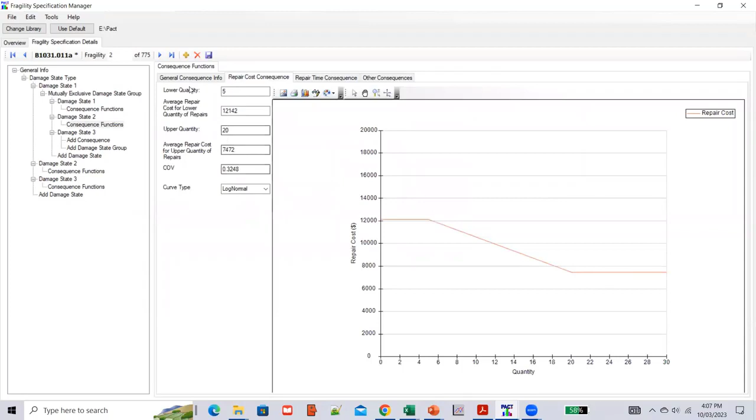Then this is the damage state 2, this is the description, and these are the consequence functions, right? The repair time, see, for damage state 1, you didn't need any repair, and this is the repair cost, and this is the general consequence information.

And for the most important and the last damage state 3, right? So for the damage state 3, your repair cost consequence, your repair time consequence, and the other consequences.

So you can add another damage state to these 3 fragility curves, and it will require you to define it and to add an image of it, how it will look like, and then you can save it, right? So this is how the fragilities in PACT have been defined and incorporated, and you can check them, and you can use whichever one better suits your results, right? So this is how you define the fragilities.